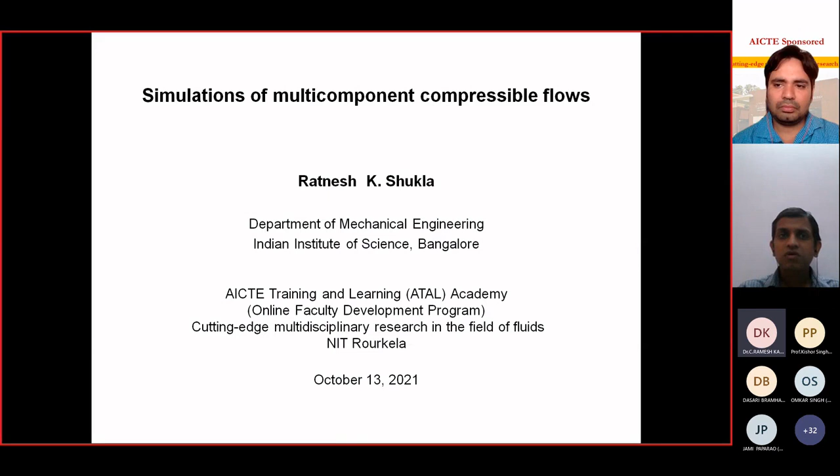In this talk I'll talk about simulations of multi-component compressible flows, and these are actually ubiquitous in nature. So if you look at ejection of a volcano and the kind of gases that come out of it, the particles - it's a particle and gas laden flow which is very distinct from the ambient. It's a very common example of a multi-component flow, and this ejection takes place at a relatively high speed. So the flow is compressible as well, right?

I mean, later after the ejection, once the jet expands and so on, you may enter into a relatively low speed regime, but right at the point of ejection, the ejection speeds can be sufficiently high for compressible effects to be important. So we'll see this is one of the examples, but we'll see several more as this talk progresses, and these kind of scenarios where one gets very high speed flows in nature alongside multi-component behavior, where you get a lot of different components sitting together in the same flow field, is very common. These sort of applications are also common in technological areas.

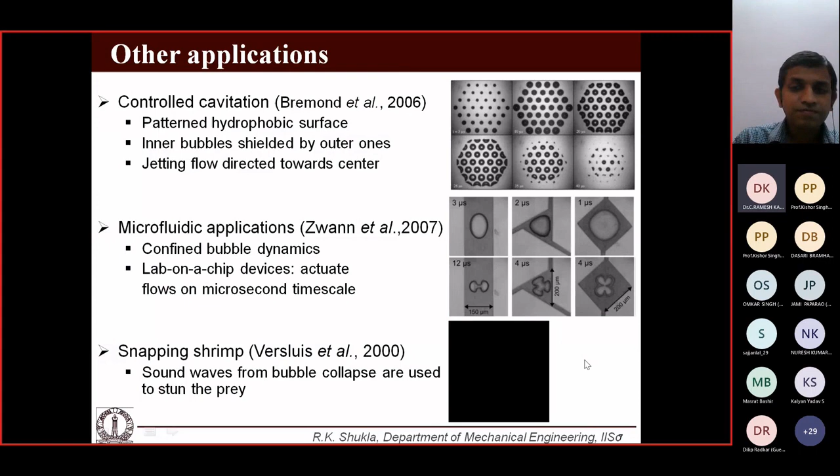Just as a cool thing, there's a reference to snapping shrimp in Hollywood as well. This was, I think, a very recent movie where the actor says that the strongest animal on this planet is not the lion, it's the snapping shrimp, because of these stunning things it can do.

I mostly talked about the experimental part and what is actually observed in nature. What we really want to do is understand and analyze this intense process using simulations - that's the primary objective of this talk. How do we develop simulation tools that can accurately account for this intense and fast process? Clearly, this is a very multi-scale setup - you have water on one hand, air on the other.

Water, as you would know, is almost incompressible. We don't really hear about shock waves in water, though they are always there. Water is so stiff that one normally thinks of it as completely incompressible - it's not very easy to attain a scenario where water becomes compressible. But this is a kind of flow where this bubble collapses to such an extent that it's like an underwater explosion, so essentially there are finite compressibility effects.

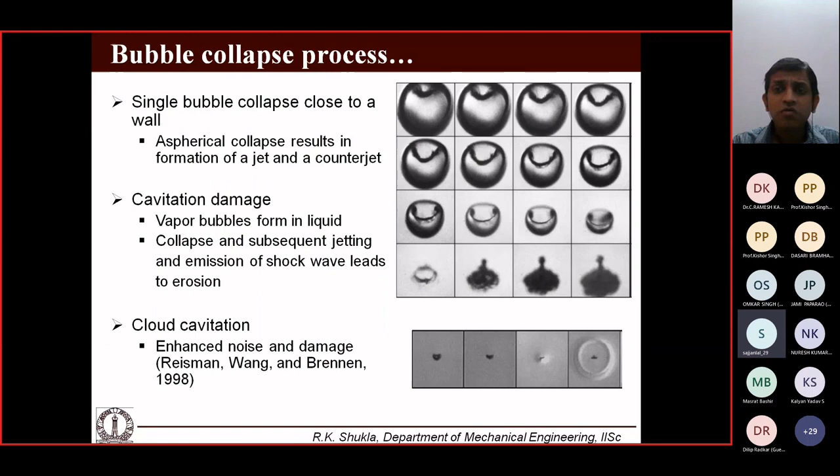Sir, one small question. You are talking about these bubbles, so when are these bubbles formed? If an aeroplane is flying at a very high speed, at a very high Mach number, maybe at 800 kilometers per hour, is it due to that pressure that these bubbles are formed? It's a liquid bubble. No, well, when we talk about airplanes, it's actually a drop, not really a bubble, if you think about it, because here condensation has taken place.

Yeah, it's a different scenario. Here you have air which has water vapor in it, and there's an expansion fan that is created. Expansion meaning, think of it as you have air and you have suddenly increased the volume that it occupies. So it will undergo isentropic expansion, which means the temperature will drop, and if temperature drops below a threshold, you can get condensation. So this is more of a condensation effect, not really a cavitation effect. Here, on the other hand, you have extremely low pressures that are created inside water. So here you have creation of vapor bubble pockets, basically. You have vapor bubbles that are created.

Okay, sir. Okay, sir. Thank you, sir. So the two scenarios are kind of distinct. Any other questions? Any other questions from the audience? Yeah, I think we can go ahead, sir.

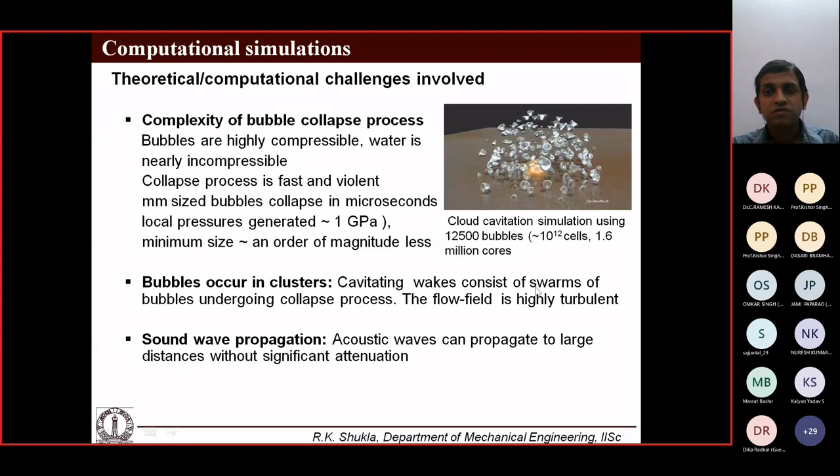So we know that this is a challenging simulation, and let's think about what are the desirables that we want in this simulation. So some of the desirables are we should certainly allow for large interface deformations. This bubble actually grows, it expands, there's a jet that is formed, and all this means that the interface of the bubble can undergo significant deformation. So that must be allowed for.

There has to be interface capturing. There's certainly an interface that separates the bubble from the liquid, so we have to have interface capturing methods. We also need shock capturing methods, because during this collapse process, shock waves and blast waves are generated. So one has to have shock capturing capability as well.

Beyond that, it's preferable to have conservation because we have shock waves and we also have interfaces. So it's not just preferable, it's mostly a requirement that one has to be able to conserve mass, momentum, and energy. Without this conservation, we will not get accurate treatment of shock waves. So this is more of a requirement.

What's special beyond regular shock waves? If you are familiar with shock capturing, you would know that once conservative treatment is applied, there are a lot of different techniques that are available now for capturing shock waves, whether they are weak or strong.

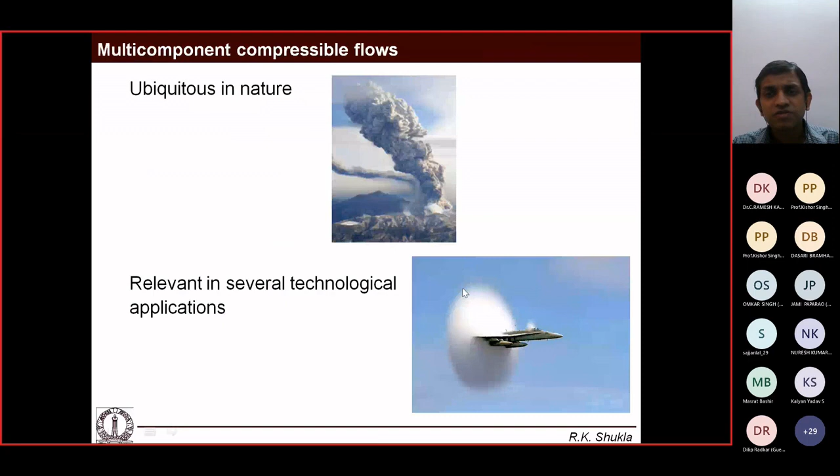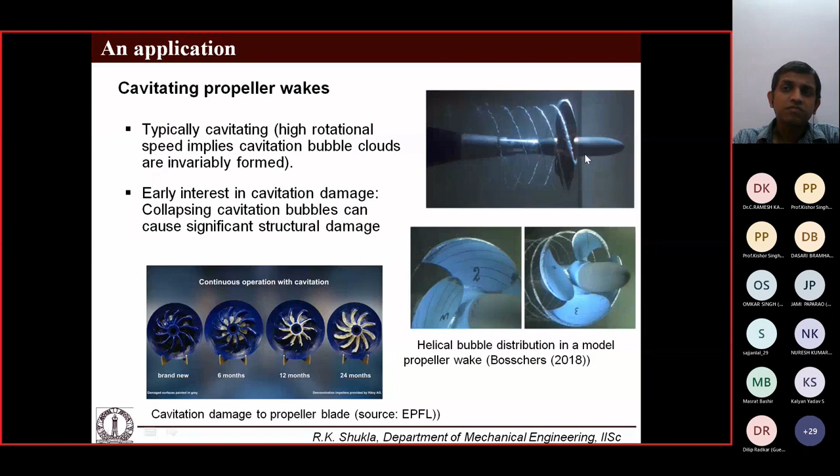Not only that, we are looking at cavitation actually. So as somebody pointed out, how is this pocket of droplets formed? If you look at this jet that goes through Mach 1 transition, you have formation of these droplets. Similarly, in this cavitation scenario, as these propeller blades rotate very fast, you actually have formation of these bubbles - vapor bubbles. So you are creating a new medium inside this medium, which is water.

So if one wants to actually do a first principles investigation of cavitation, one has to allow for the creation of multi-material interfaces as well. It's not always that you will start off with a bubble. You will have to allow for the fact that if the pressure drops below a certain threshold, you will get bubble formation.

And not only that, one has to be able to ensure that the whole formulation we take is relatively insensitive to constitutive laws. In other words, this formulation should hold whether today you have one equation of state for water and tomorrow you decide that this equation of state is not enough for your purposes and you need to change it. So the formulation should be such that it allows for this change. These are some of the challenges that are very specific to this bubble collapse problem.

So in this work, what we do is take this so-called single fluid treatment, where the conservation laws - basically the mass, momentum, and energy - are written for all the phases that are present in this setup, so for both water and air.

And these different phases are distinguished using this variable phi, which one can think of like the void fraction or the phase field. This field is governed by the interface advection, a simple interface advection with the local flow speed u.

I'm just showing why these propagating vortices and other features are important. If you look at a very simple case of flow past a cylinder, we know that as Reynolds number is increased, you start getting smaller and smaller scale flow features. Once Reynolds number is increased from 200 to 2000, you get smaller scale vortices, and the wake becomes more complex. Increase it to 20,000, you get even more smaller features, and the wake is increasingly complex. So to be able to resolve this, one needs higher order methods plus a sufficiently fine mesh.

Whereas when one has shock waves and interfaces, only a first order method is guaranteed to be monotone. Only a first order method can ensure that shock waves are captured without oscillations. So how does one balance out these two contrasting requirements?

The idea is to use what is known as weighted essentially non-oscillatory treatment. One ensures that if there's a shock wave somewhere in the domain, you find out where that shock wave resides, and close to it, use methods that do not produce any oscillations. But in a region where there are no shock waves, you use methods that are best for propagating vortices, turbulence, and so on—basically higher order methods.

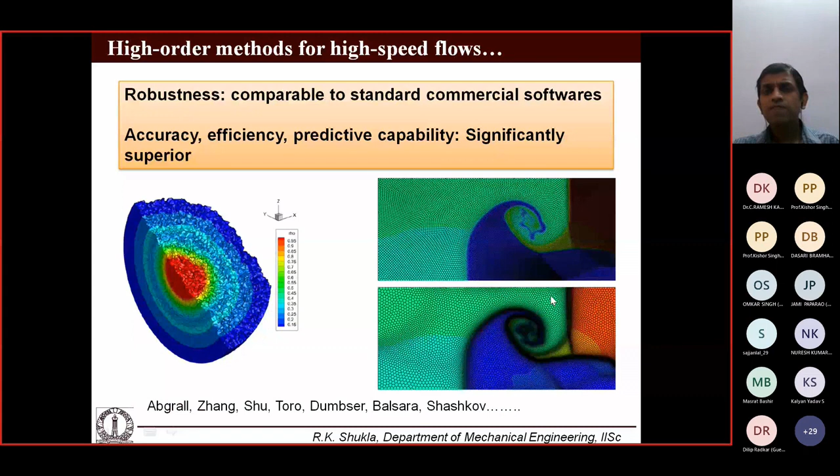One needs to be able to reduce the numerical dissipation and increase the order of accuracy, and that is done through this WENO discretization. I'll briefly talk about the WENO discretization on unstructured grids. This is something we have spent quite a lot of time with, so that we can move forward with this particular problem at hand. Let me skip this slide and go on to the WENO scheme, what it really does.

If you're familiar with higher order methods, you'd know that what they typically do is take a wider stencil and try to come up with approximations based on data from each of these nodes. So if one has a uniform mesh where, in one dimension, the data resides at I plus 1, I plus 2, I minus 1, I minus 2, and so on, then to construct something like a fifth order method, one would take all these 5 data points and apply—let's say I want the formula for the derivative at this point—polynomial interpolation or Taylor series expansion to come up with a formula. This is the typical approach used for higher order method construction.

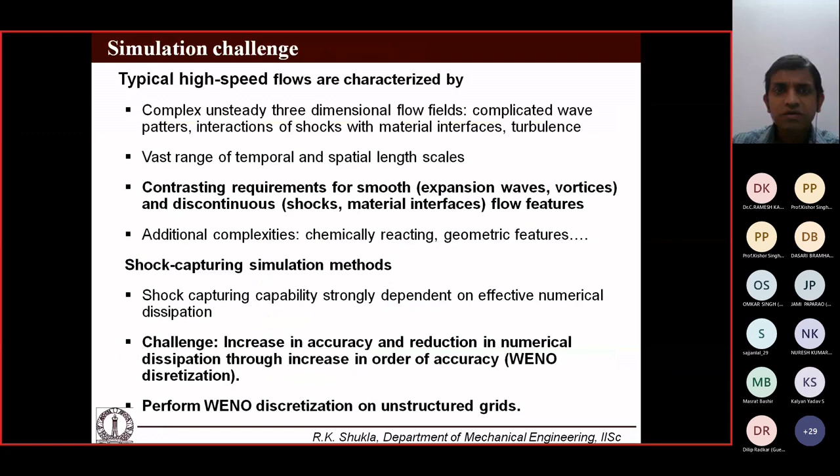Hello, your mic - can you hear me? Now I can hear you. In between it was stopped. Oh I see, it's proper now. Okay, all right, the screen is visible I hope. Yes. Okay.

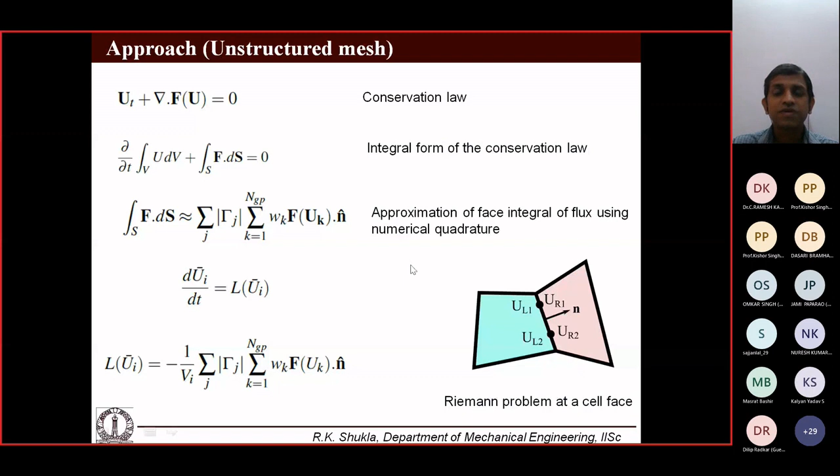That's the upwinding idea. Basically, you figure out where the wind is blowing and then take the appropriate value, which gives you a stable solution. Here, when there are shock waves, rarefaction waves, and strong compressibility effects, the correct upwind value actually depends on the Riemann problem—the solution structure that emerges out of this entire system.

So that's why one tends to solve this Riemann problem at each of the interfaces to figure out the correct upwind flux, which ensures the computations remain stable. Now, what are the advantages? Once we use a sufficiently higher order method, discontinuities are spread over only a few grid cells, and features like propagating vortices are accounted for accurately because we use a higher order method near these features, while the lower order method is only used where we have shock waves.

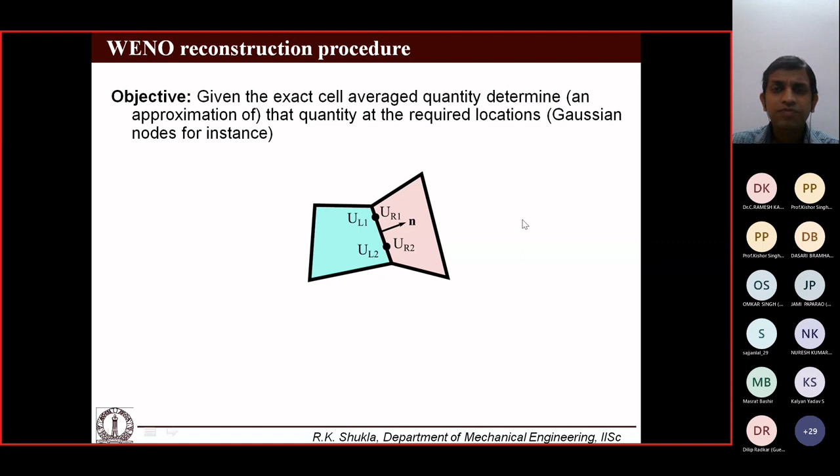Let me spend some time on the WENO reconstruction itself, because that's also a complex operation—not straightforward, especially on an unstructured mesh. A key operation here is figuring out the values of the state variable along all the interfaces, given the cell averaged quantities. I'll illustrate this procedure on a Cartesian mesh.

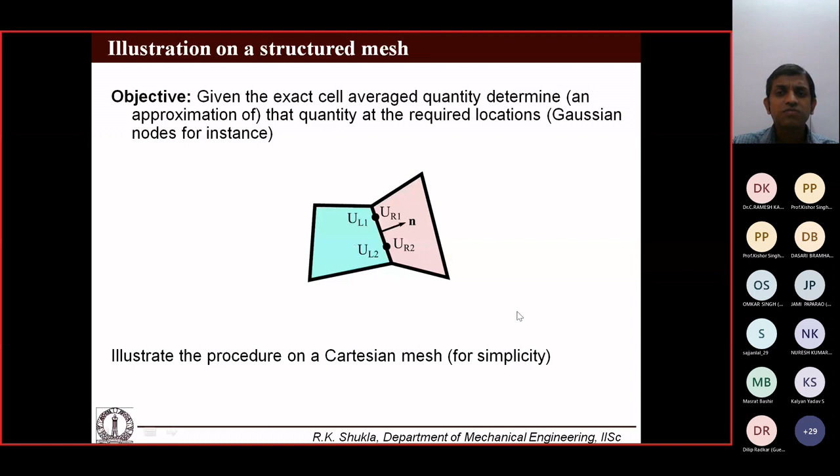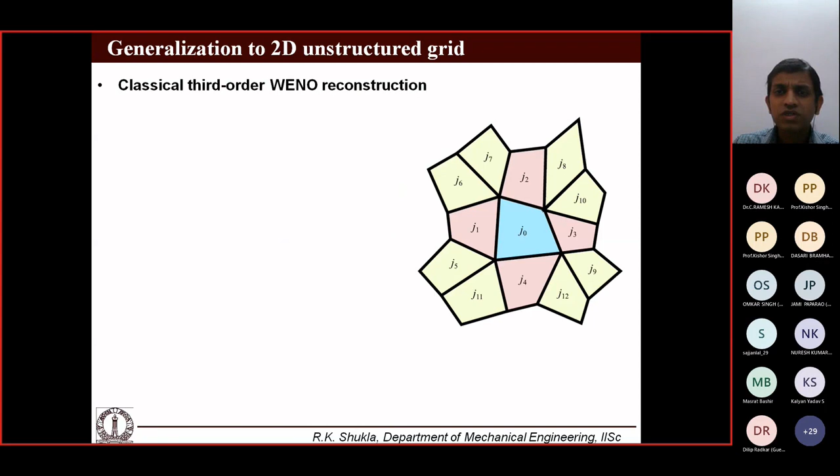So what we actually do, coming back to the scenario I showed earlier, is take a fifth order method formulated over this entire stencil, and a bunch of third order methods. We add them all together in weights that can be suitably chosen, and then use that approximation to figure out what we should do.

So if we know there's no shock, we directly use the fifth order method—we don't try to combine third order methods to come up with it. If there are shocks, then we apply each of these third order methods in an appropriate manner. All this is done so that the algorithm automatically decides which approximation to take. That's the basic philosophy.

I thought I'll just illustrate this for a simple Cartesian mesh. So if we have a cell here over which we want to figure out how the solution varies, what we do is expand the solution out in something like a Taylor series expansion. Here we use Legendre basis functions because of the simplicity they give—the expressions tend to be less cumbersome, and the smoothness indicators tend to be very compact. That's the basic reason.

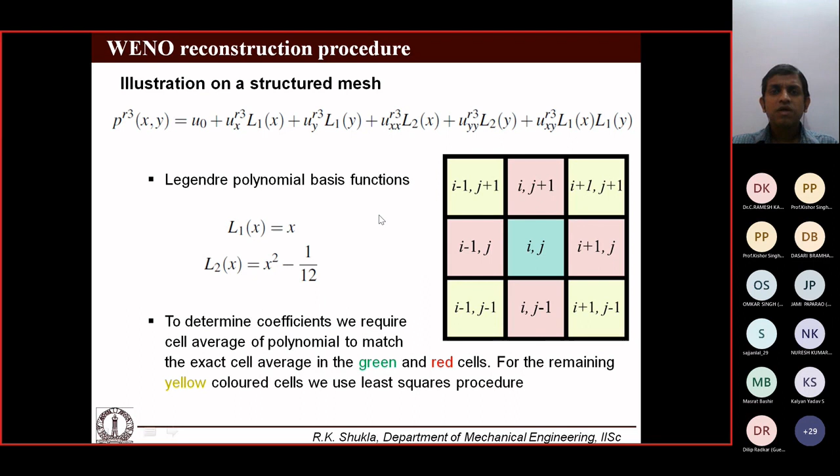Using these expansions, what we do is ensure that the cell averages over all these different colored cells match the average of this P. Once we have that, these coefficients can be easily figured out, and one has the full approximation.

One also gets this smoothness indicator. I talked about combining fifth order, third order, and various order approximations, but how do we actually combine them? We need something to tell us whether there's a shock or no shock, and that is done through the smoothness indicator, which is basically a sum of these various derivatives, all up to the highest order point.

So if we have a third order method, we go from the first order derivative all the way up to the second order derivative—various possibilities. If the solution is not smooth, one expects that at least one of them will blow up. If you have a discontinuity, you expect that the derivative across it will be extremely high. That's the basic idea.

These smoothness indicators involve a convex combination of the derivatives, so if there's a discontinuity, that will show up in the smoothness indicator. On the other hand, if there's no discontinuity, one expects this will be an order one quantity.

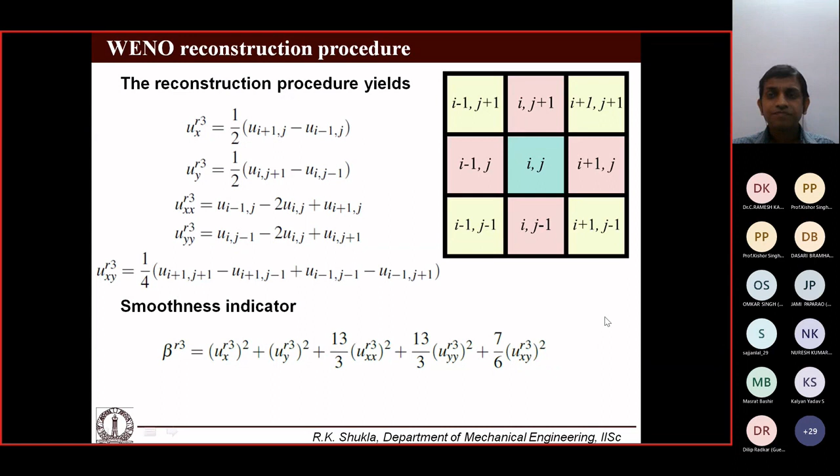I'm not going to go into the details here, but the use of this Legendre basis function simplifies this smoothness indicator quite a bit.

This very same idea can be extended to unstructured grids as well. We may not find explicit solutions like this, but we can formulate the entire problem as shown here, and come up with a system for finding the coefficients, solving it using the least squares method to get the entire system of coefficients. Once the coefficients are deduced, one can have second order candidate stencils like these, over which one can formulate a second order method, and then combine them all together to get a WENO polynomial. So that's the basic approach.

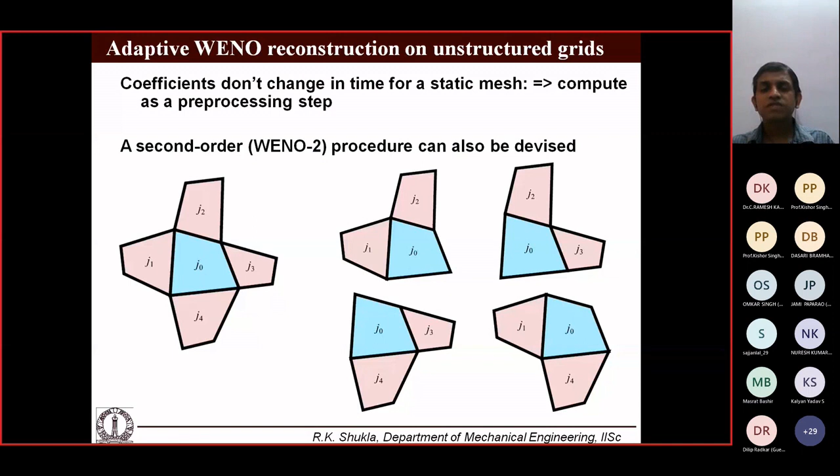When it comes to boundaries, there are complexities there as well. If you think about what's typically done in computational fluid dynamics, for a boundary on a Cartesian mesh, it's relatively straightforward to use ghost cells to implement the boundary conditions. So if I have a no-slip wall, I can compute my velocity field in each of these cells such that I get zero velocity all along this boundary.

And if I have another stencil where more cells are needed, I can extend this process—figuring out the values here such that the velocity becomes all zero. That's the basic idea behind ghost cell based construction.

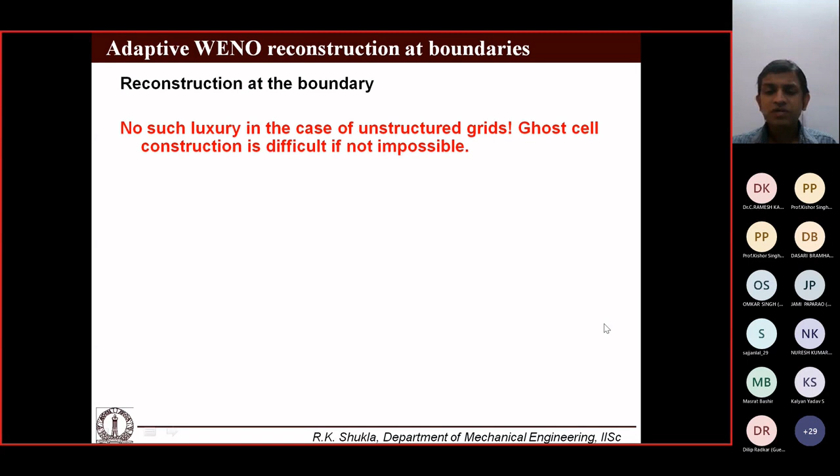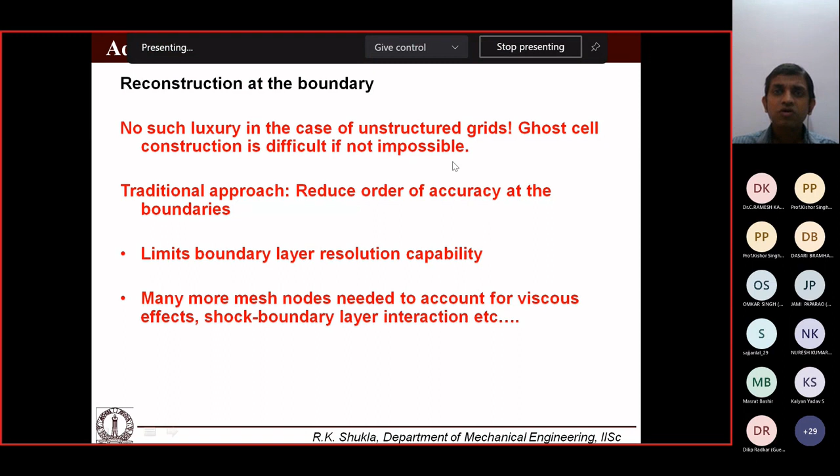Now, when it comes to an unstructured mesh, things are much more complicated—we cannot just generate ghost cells like this. So what do we do? One possibility is that we reduce the order of accuracy: we say we cannot create these ghost cells, but we can use incomplete stencils and reduce the order of accuracy to whatever we can, then do our boundary treatment.

But the problem is that for any problem involving boundary layers or features at the wall, our resolution becomes limited, so our calculations of the skin friction coefficient will be off. This is not something we desire. So instead, we use these boundary conditions as constraints—if this is a no-slip wall, all along this boundary I should have zero velocities, so I can impose them as constraints onto this reconstruction operation.

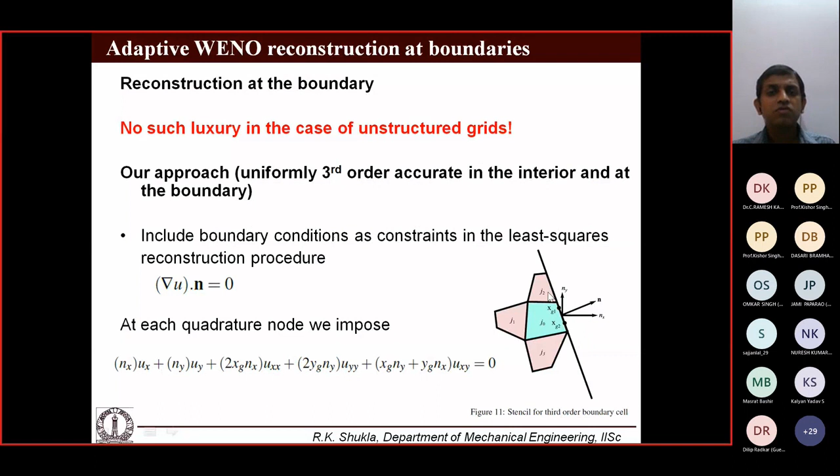When I'm figuring out what is happening to the solution inside the cell, I can add this constraint and treat it in this entire reconstruction framework. So that is what we do when we have either homogeneous or Neumann boundary conditions of this form. It can be very easily adapted to our general framework here.

And the process of reconstruction, however, almost remains the same. Basically, one again has these weights that can be applied to figure out the WENO interpolant, and one has these smoothness indicators that tell us whether there's a shock in the setup or not.

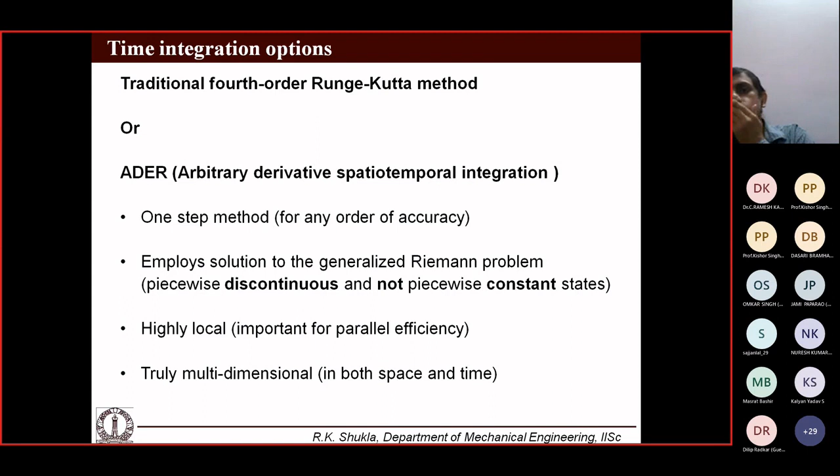Sir, I would like to ask, as you said, third order, but on unstructured meshes getting more than second order is a very tedious job. So here you're proposing the idea where first we create the second order and then we extend further for higher order using the basis of that reconstruction, like polynomials.

Yeah. So the polynomial direction, if I understand, the third order needs 3 unstructured cells, right? At least. It needs a lot more, Kishor, because you need to be robust, actually. So that is not something I talked about.

On an unstructured mesh, there are a lot of possibilities for the arrangement of cells. You may have a situation where there are none of these yellow cells at all. You may have a cell which is only surrounded by these pink ones. So one has to ensure that all these different possibilities are accounted for. But nonetheless, the coefficients to be determined remain the same—1, 2, 3, 4, 5, 6 coefficients.

That means I should generate at least 6 conditions from the stencil that I have found. But actually, in practice, you require around 10. The common practice is to have at least 10 to ensure that you are robust. And the reconstruction operation is genuinely multidimensional. So you can see that the basis functions used here involve x, y, x squared, y squared, and so on—these variables, basically.

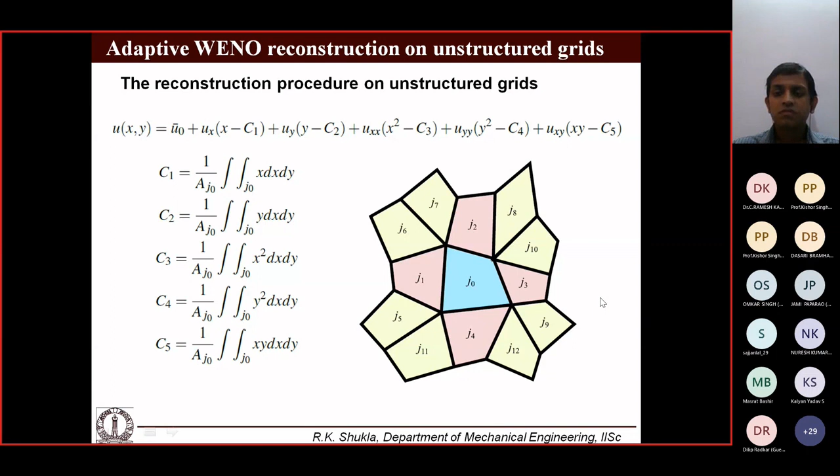So once this spatial discretization is complete, there are various options for time integration, as I mentioned. One can go with the traditional Runge-Kutta methods, like fourth order Runge-Kutta method or strong stability preserving Runge-Kutta method. Or one can also do this arbitrary derivative approach.

Again, we are not going to go into the details of this in this presentation, but this is a well-established technique now. It's more like a one-step method where the temporal derivatives present in any solution are actually converted into the spatial derivatives. In a way, if you recall the modified equation approach, it's kind of similar, not exactly the same, but similar to that. You essentially convert all the temporal derivatives into spatial derivatives so that a one-step approximation can be used to integrate the equations in time.

And the advantage with that approach is that it's very local. Because it's just one-step integration, it's very good for parallel efficiency. So parallel implementation of the code becomes simplified, and you can attain large parallel efficiencies. Not only that, the approach is multidimensional because both space and time get coupled together. So there are advantages of using this arbitrary derivative spatio-temporal integration, basically.

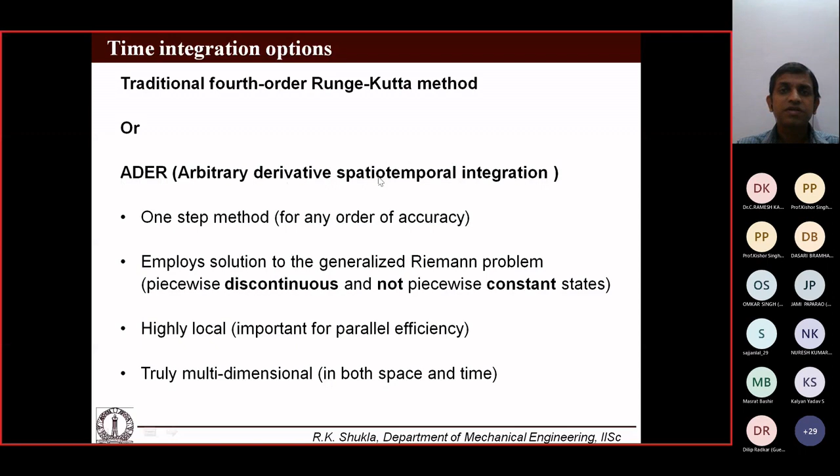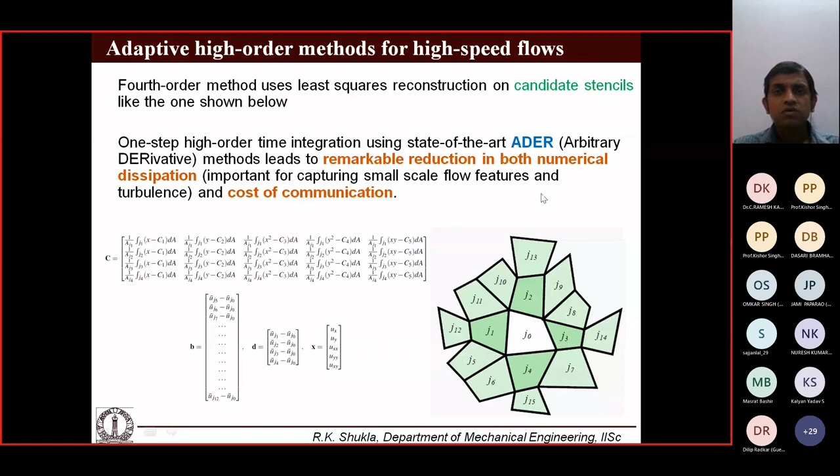Now, with this, I will just demonstrate some of the simulations that we have been able to do, and this is the first one. A very simple accuracy test involves propagation of an isentropic vortex, or also a Taylor-Green vortex that you might be familiar with, in which you start off with a bunch of vortices, and as they interact, they become increasingly complex and can give rise to turbulence, basically a decaying turbulence sort of scenario. The motivation here is to establish the accuracy and convergence rates, and also study the scalability of this entire formulation.

This isentropic vortex test case is a doubly periodic setup, meaning this vortex advects and then comes back into the domain and continues to advect. In an inviscid scenario, this vortex does not undergo any deformation, and one is expected to get back the same vortex no matter how many times you advect it.

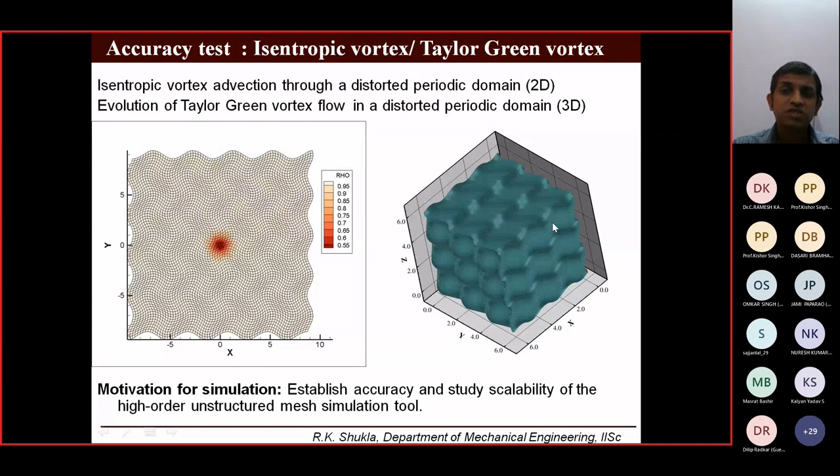This is the Taylor-Green vortex flow, solved over this domain, which is purposefully distorted so that our unstructured mesh formulation can be tested completely. What we find is that if we compare our results with direct numerical simulations, our implementation is not too bad. The dissipation rates from our implementation are very nearly comparable to those from direct numerical simulations.

We also did some scalability tests. Looking at advection of the isentropic vortex test case, we find that if we go up to around 10,000 processor cores, the scalability of our method does not deteriorate significantly. We still get in excess of 90% parallel efficiency, even at this large processor core count. So this approach works quite well. We do get higher order accuracy as well as good parallel efficiency with this approach.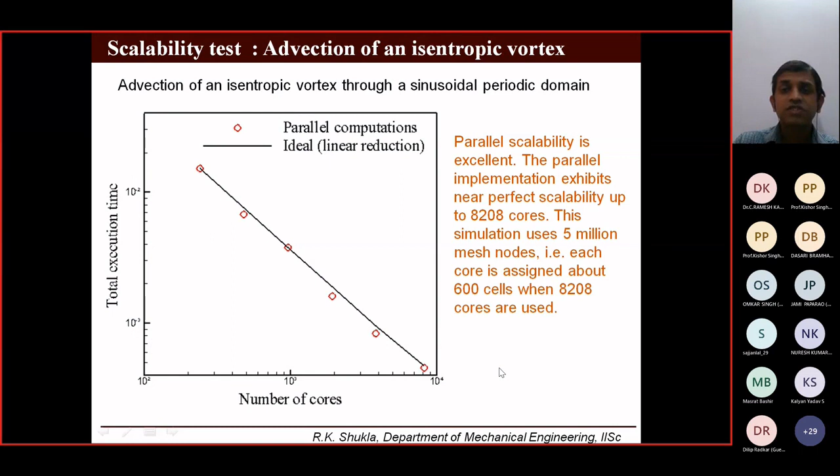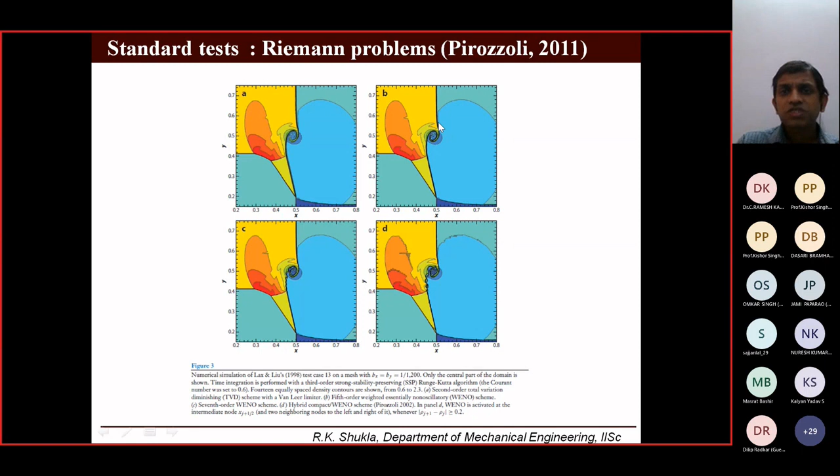This is one of the test cases taken from a paper cited here. You can see there's a vortex that forms in this test case, and this is the kind of result we get. We have run it at reasonably high resolution. Not only that, we also get these Kelvin-Helmholtz instability patterns along this contact line. These would show up only when the method has low dissipation and the resolution used is sufficiently high. The fact that we can capture this tells us our method is indeed a low dissipation method.

In fact, with a third order method, you don't actually get these features. We can run a fourth order WENO as well as a third order WENO, but with the third order WENO, we don't get as many flow features because the dissipation is comparatively higher.

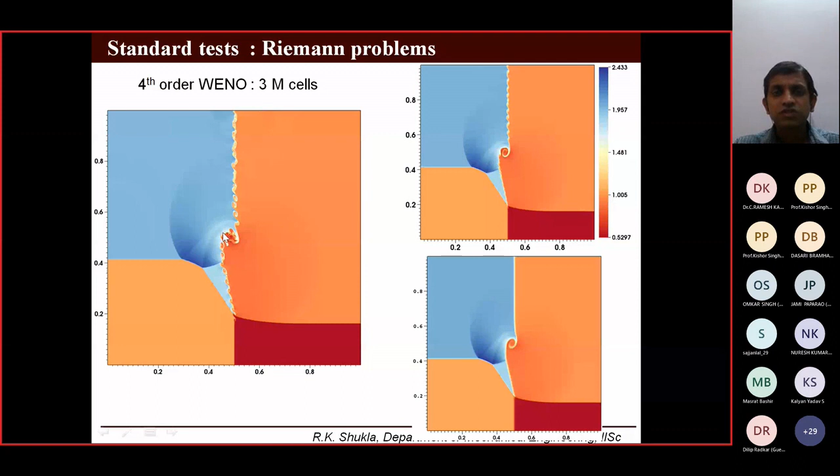Similar setups are possible. This is another one taken from a different paper. You get flow features where you have vortices that are sheared and contact lines also. The amount of detail we capture is extremely high, much higher than what is captured here. The order of accuracy used here is actually seventh order, and ours is a fourth order method, but obviously we are using many more grid points as well. That is a fact.

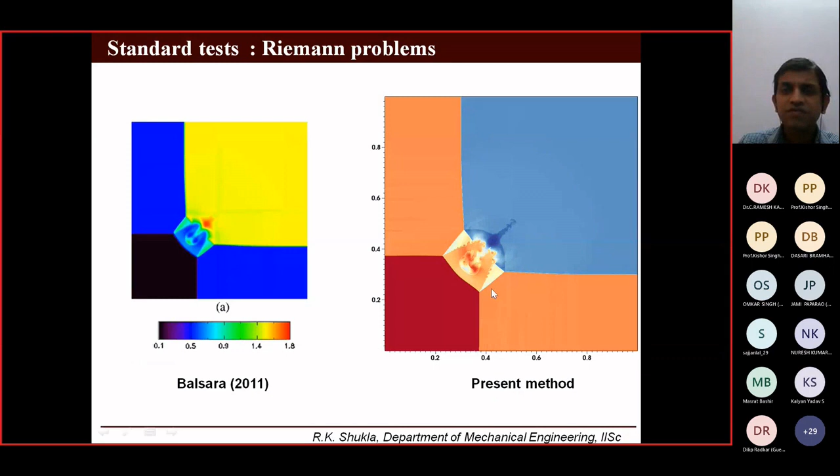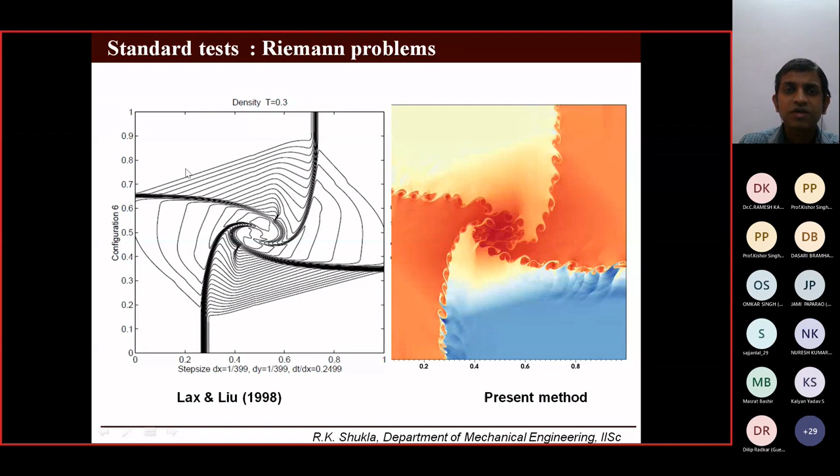Almost for every Riemann problem one can find in literature, our method captures and gives far more details. Here you can see what kind of details are captured using our method, compared to what is captured in the literature.

There are more challenging setups that can also be simulated. I'll just skip this one and talk about flow past a cylinder. This is a Mach 10 shock propagation over a cylinder.

I hope you can see this animation. You can see here that not only does our method capture these various shock waves, but it also captures the unsteady wake that is formed. This shedding of the vortices is captured pretty well.

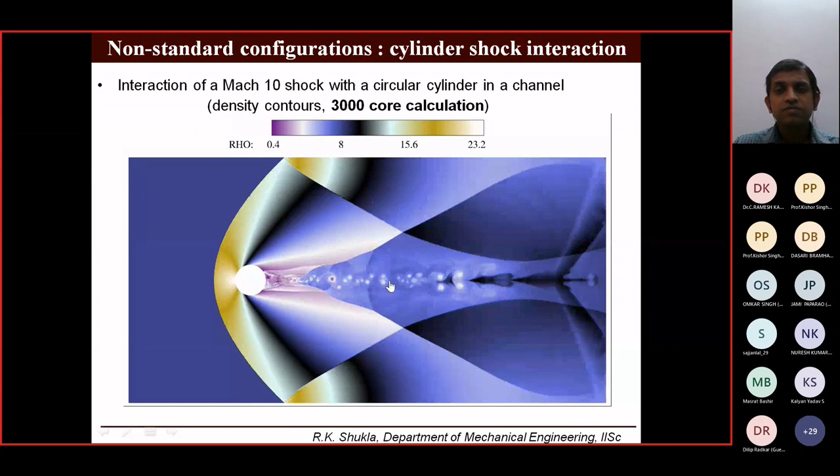And this is a 3000 core calculation, so a reasonably large calculation. The mesh applied here is unstructured. Let me come to that, Kishore.

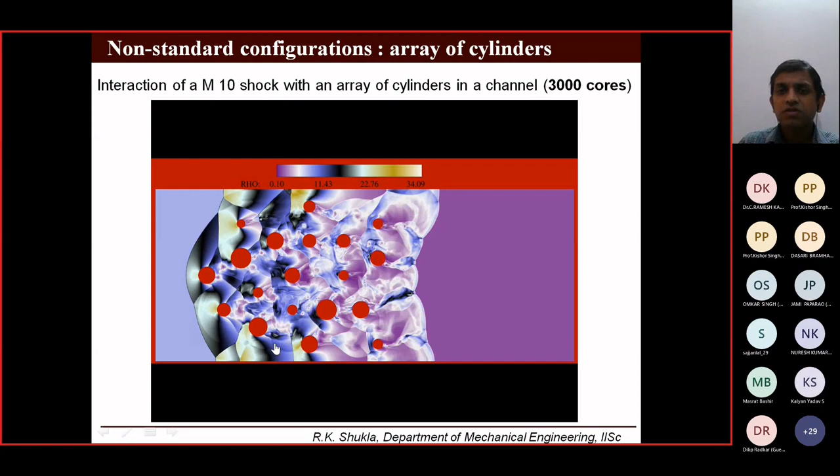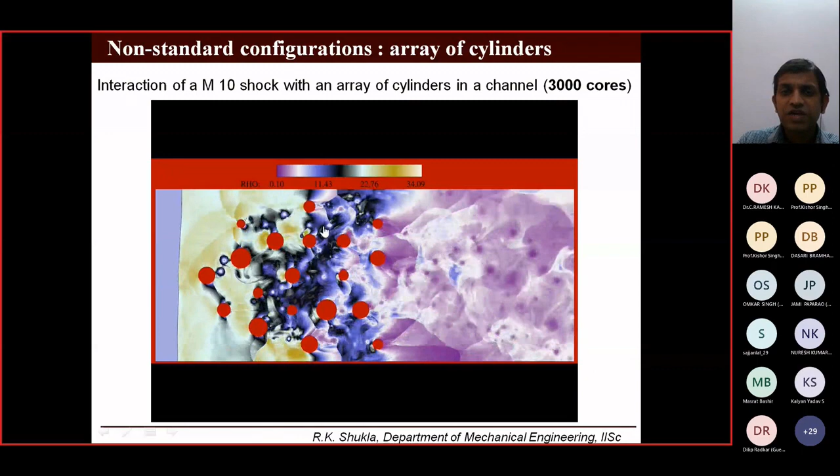This is a similar problem like flow past cylinder, but here you have a cascade. You can see we can capture these shocks as well as very strong vortices. The solution is non-oscillatory. You can see very detailed wake patterns are captured here as well.

I hope the animation was visible, despite the fact that we are doing it over internet. Yes, it was.

So, was there a query? Audience, anything you'd like to clarify here?

Okay, I'll just continue. So we have done a bunch of calculations, just to test the fidelity of the solver. This is like flow past a foil with a flap. I'll go reasonably fast over these.

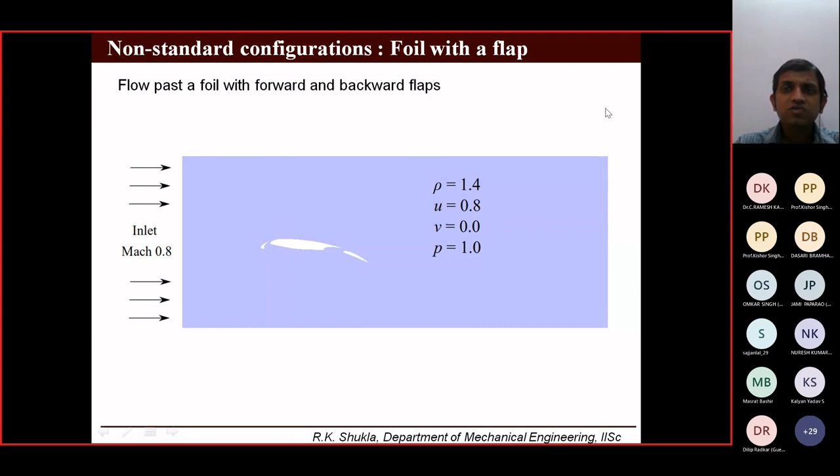Here the mesh can be very unstructured. You can have a higher mesh density close to the foil, and these are the kind of flow patterns that we get. When the flow starts, you get these shock waves that are formed, and then you also get propagating vortices that travel over the surface and are shed into the wake.

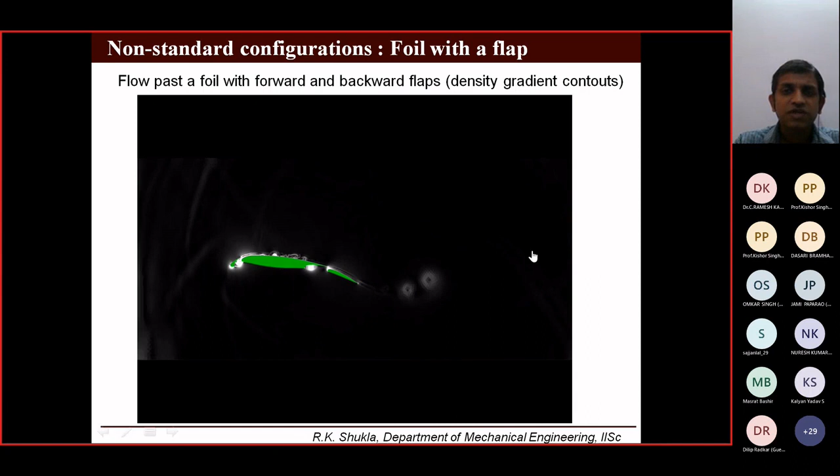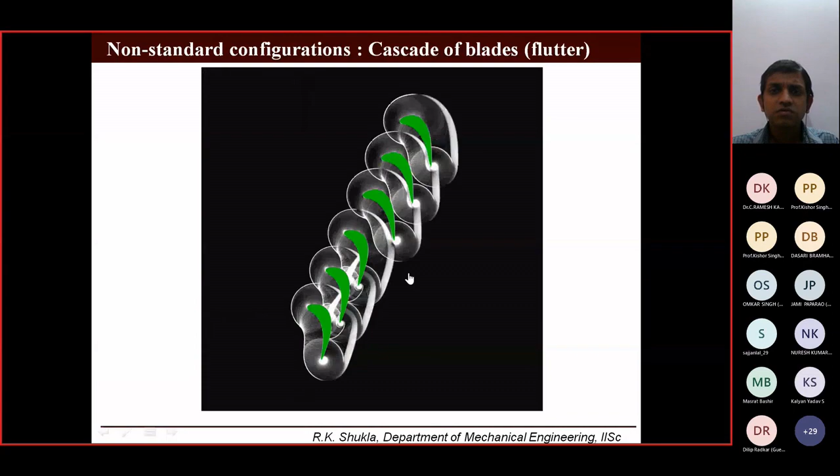So a lot of these different flow scenarios can be computed. We can have a cascade of airfoils as well. You can see formation of shock waves as well as these strong vortices. So there's flow that enters this cascade and then exits like this.

Because the primary interest is in getting on to the multi-phase part, let me still show this one as well. This is a non-standard test case in the sense that there's complex geometry. In this blue region, we basically have something like ambient air. We have a triangular inclusion somewhere in between, and we have an explosion scenario where this circular region consists of very high density and very high pressure.

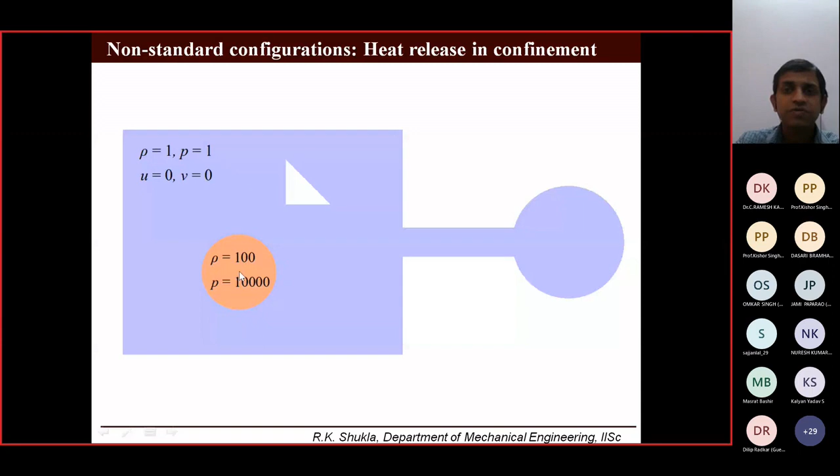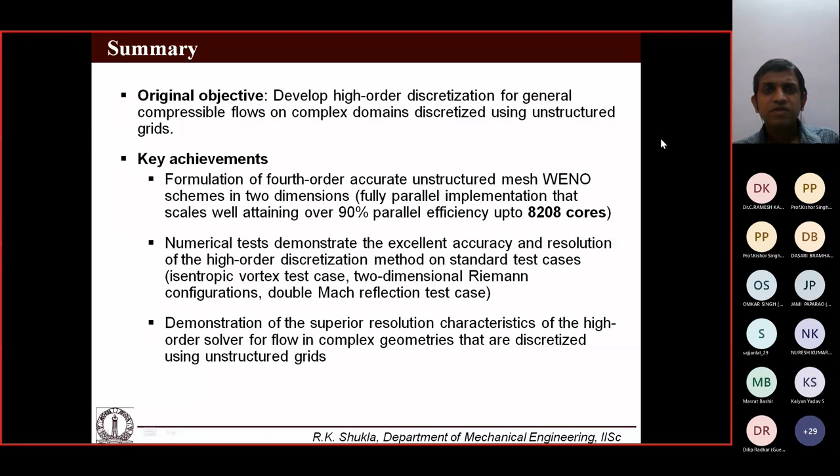This technique can essentially be used fully in parallel, and it's fourth order accurate, so it's low dissipation and can be used on a large number of processor core counts, allowing us to look at very detailed flows. Okay, now let me just move on to the multi-phase flow part.

So the multi-phase flow part: till now we have looked at the fact that we want to capture propagating vortices and shocks both simultaneously, and still use a higher order approximation as much as possible. What is special about the multi-phase part? What do we need for that? The key aspect here is that we need to be able to capture the interface that separates the two phases. What is special about this interface is that it's a contact discontinuity.

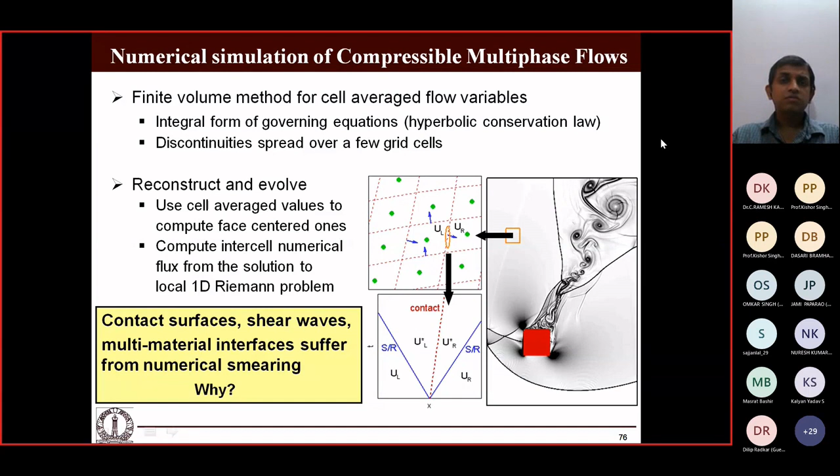One of the problems is that if we take a simulation and just apply the compressible flow solver to it and use it for a multi-phase setup, the interface will diffuse over time. That is because the interface is treated like a contact discontinuity, and by its very nature, the dissipation added to keep the solution stable will continue to spread this interface over time. That spread is unphysical and not desirable.

In a simulation, if we start off with a bubble that is initially sharp, and then over time, just because of bad numerics, it spreads, that's not desirable. It should spread only if it has to, for instance because of evaporation or mass diffusion. But if it spreads because of numerics, that's not something you desire. So we spend considerable time trying to come up with methods which prevent this spread, to ensure the interface does not spread.

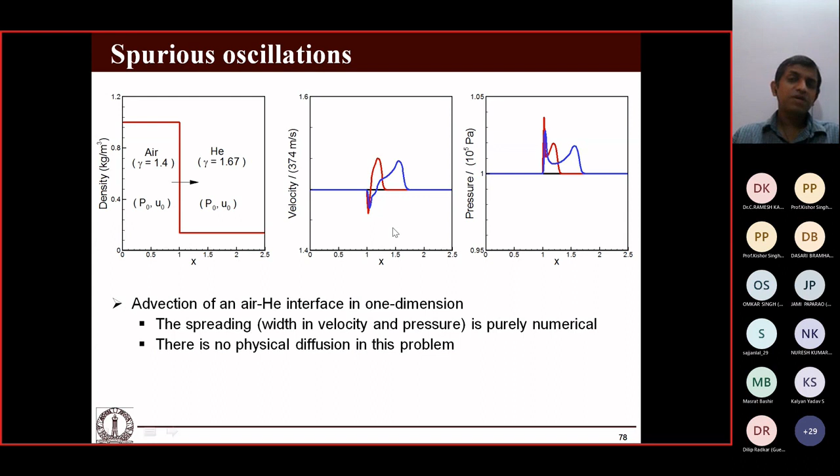If we allow it to spread, even in a simple one-dimensional setup where you have air on the left, helium on the right, with an interface that advects—if we apply a typical compressible technique like what I've shown so far, one finds that not only does the interface spread, you also get spurious velocity jumps and pressure jumps. If the interface simply advects, one should have constant pressure and constant velocity maintained throughout. It should not change at all. But that does not happen with typical compressible flow solvers.

So we have remedied this through various means. Our solutions have been discussed in detail in the literature, and our method is one of them, which relies on this diffuse interface treatment. If you recall our objective from when we initially talked about different methods, one of the key requirements is that we want to allow for creation of interfaces. If cavitation inception takes place, one has to be able to grow a bubble in the liquid. That requirement can only be satisfied by this diffuse interface method.

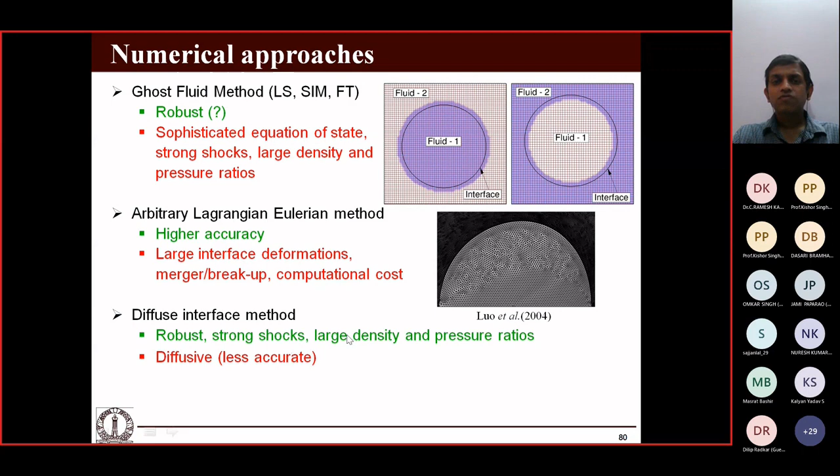So for this reason we went on with this particular method, and we also ensured that the interface does not thicken over time. To overcome this problem of numerical dissipation continuously thickening the interface, we came up with an artificial compression method, similar to a conservative level set method, and ensured that the interface thickness remains maintained throughout the simulation. Even though the interface is spread over a few cells, the number of cells it's spread over remains the same throughout.

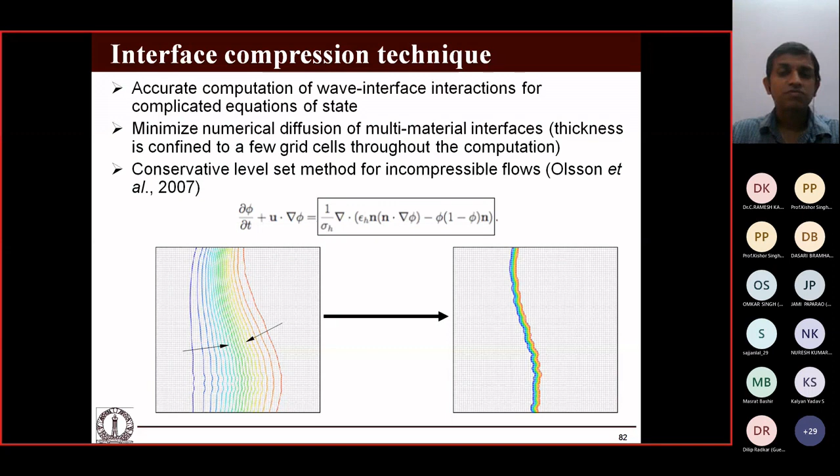This is more about trying to summarize the kind of challenges one can face and how one can overcome them. Problems like these require integration of a lot of different techniques. This is another technique that one can integrate into this setup. We know that in these problems, the bubble undergoes a lot of deformation.

The bubble can shrink a lot, its size can vary a lot, so it makes sense to not just use a uniform unstructured mesh everywhere in the domain, which is non-adaptive. One wants to do something like an adaptive mesh, where let's say a bubble is sitting here and another bubble is sitting here—you would want to put more mesh points close to wherever the bubble sits, because that's where most of the action takes place. This can be done using adaptive mesh redistribution, a technique added onto this flow solver that allows us to put more grid points close to the bubble or wherever the action takes place.

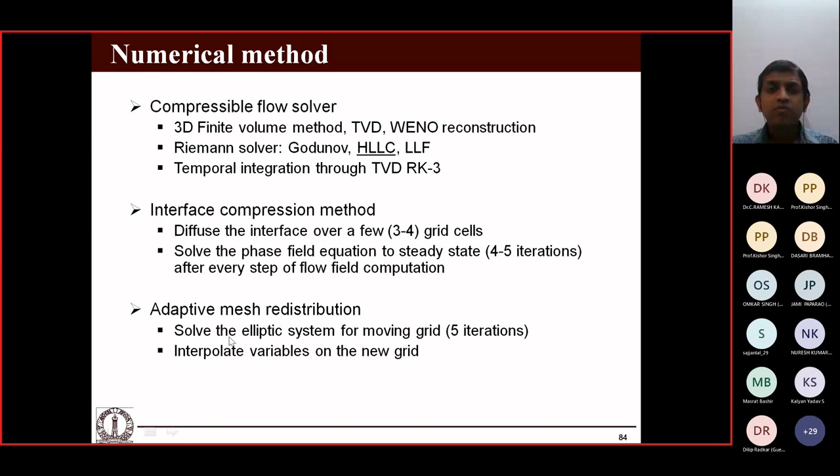I have mostly talked about the numerical method in the compressible flow part, so I'll just skip this. The only added component here is the adaptive mesh redistribution part. With this, one can look at a whole bunch of problems.

We looked at one-dimensional setups first, so that we are confident in the solver—here one can get an analytical solution. You can see here we have a shock in water that goes on and hits an air-water interface. After the shock hits, it is transmitted into air. This shock is weak, as I talked about before—it won't be very visible because the density of air is much smaller than the density of water. But if you look at this exaggerated view, you actually get a shock, and you get a reflected rarefaction wave, an expansion wave that is transmitted into water.

This particular problem can be solved using our technique, and we get results like this. Because we have ensured that our interface does not diffuse a whole lot, we get much cleaner results than what one would get if the interface were allowed to diffuse. If the interface is allowed to diffuse, not only are you diffusing the bubble, you actually get inaccurate results as well—this tail of the rarefaction tends to be erroneous.

This map shows how our mesh points are arranged. Initially, when we start the simulation, because there's a shock in water that goes on and hits the air, the mesh points are clustered close to the shock and also close to the water-air interface. That interface remains stationary till the point at which it encounters the shock.

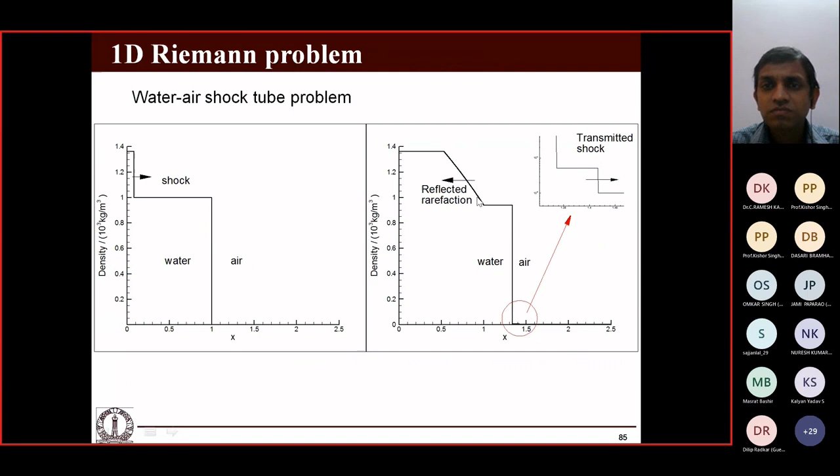Overall, our technique works well in 1D, and comparisons with exact solutions are favorable. So we moved on and looked at 2D setups.

This is a very standard setup used in the multi-phase flow community, high-speed multi-phase flow community. A shock in air hits a helium cylinder placed here, and once it hits, a lot of wave patterns are created. You get a transmitted shock wave, a reflected shock wave, and these shock waves inside this helium cylinder. The cylinder itself keeps deforming, and it also leads to formation of a jet.

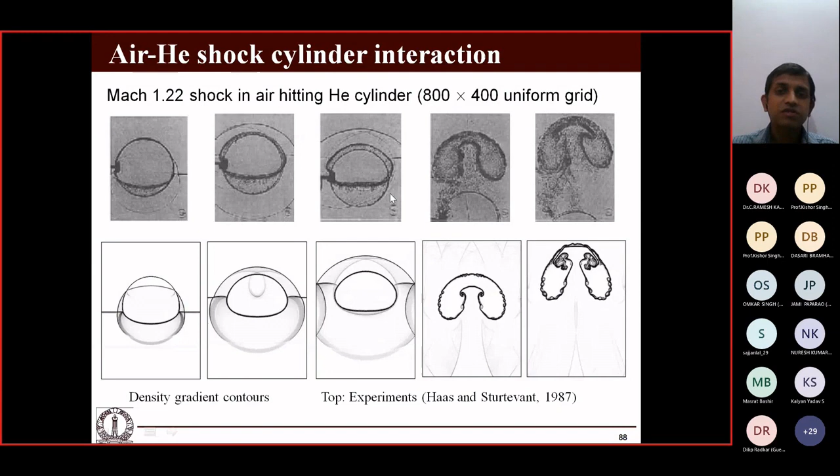This jet is actually less strong than what you get in a cavitation bubble, but it's still a jet nonetheless. If you look at what is obtained experimentally, these results are qualitatively in good match with what we obtain using our numerical simulations.

Our simulation can account for this extremely fast and intense process, and is well suited to do cavitation collapse studies. This is another example - cavitation is just one of the problems we can tackle. We can also tackle shock waves hitting, for instance.

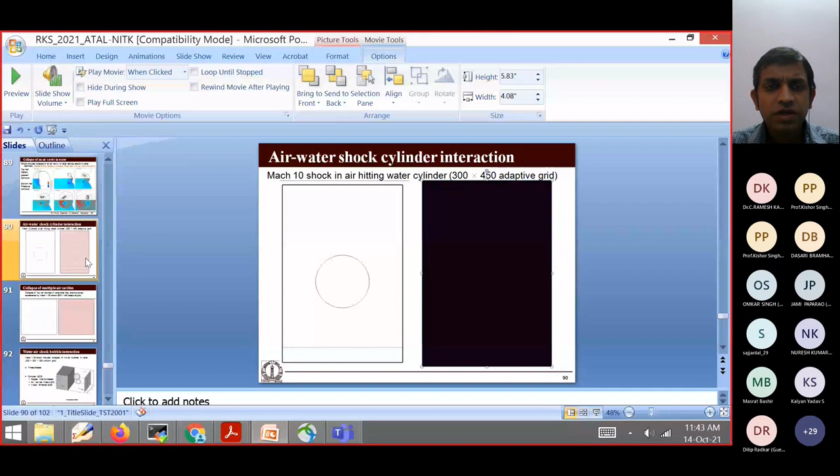Our adaptive mesh actually conforms to the gradients of the flow. So this is a generic framework which can be used for tackling these aero breakup problems as well.

There are a lot of applications in which one is interested in knowing, for instance, how a fuel droplet that is pushed at a very high speed will disintegrate in air. This is one of the setups that is relevant to that.

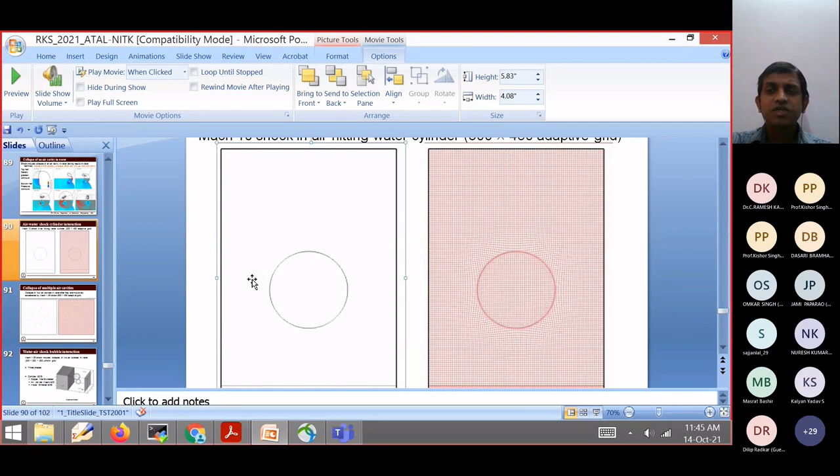As this drop is pushed through high-speed flow, the idea is to figure out how this will break up. This is not really something of direct relevance to cavitation bubble dynamics, but it's nonetheless a problem of interest, and these are also problems that can be tackled using our flow solver.

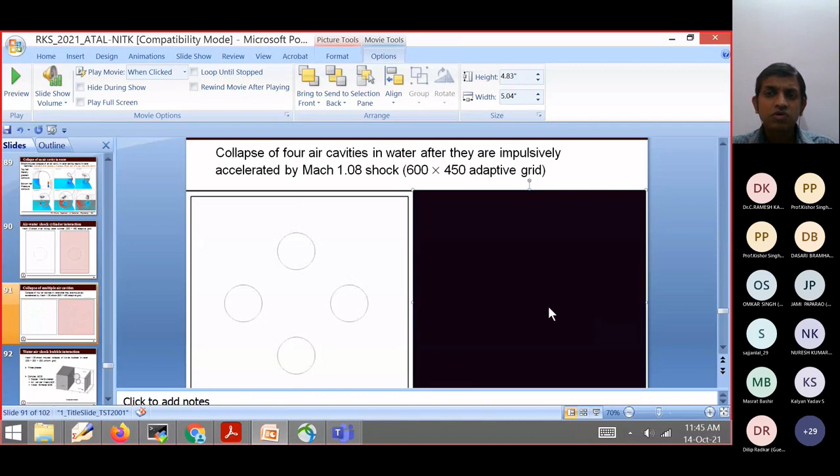And our mesh also conforms to the solution quite well. And you can see, just like the solution shown on the left, the mesh also kind of tells us what is happening to the flow field.

Okay, so these ideas are extendable to 3D as well. So I initially talked about the fact that one has to be able to simulate very complex equations of state, and treat them nicely as well, right?

So this is a full cavitation setup in which we have air bubbles sitting next to a copper medium. There's a shock in water that goes and hits these air bubbles, and the idea is we'll see what happens to copper. Does it undergo any damage or not?

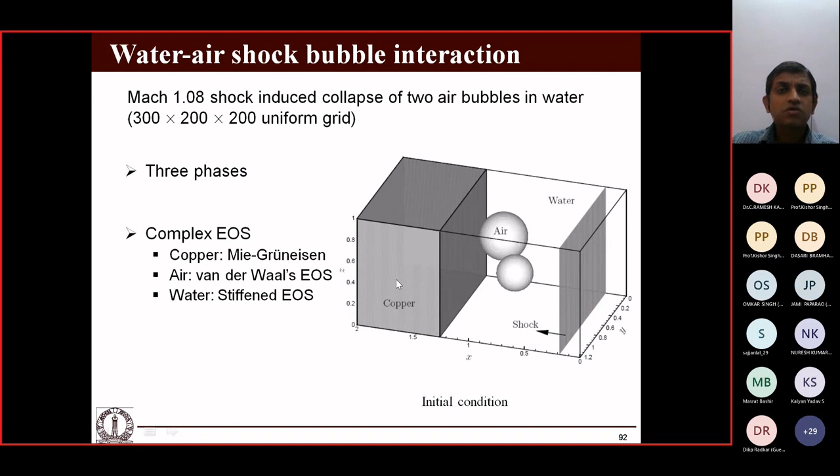Sorry, I think here again I'll have to apply the original trick of playing it first. Okay, let me try it again. I hope this is visible.

So these simulations can be used, as I mentioned before, to study something like drop shock interaction, aerodrop breakup, or even splash problems. We have also looked at a splash setup with full accounting of viscosity and surface tension effects, where a drop falls onto a pool of liquid.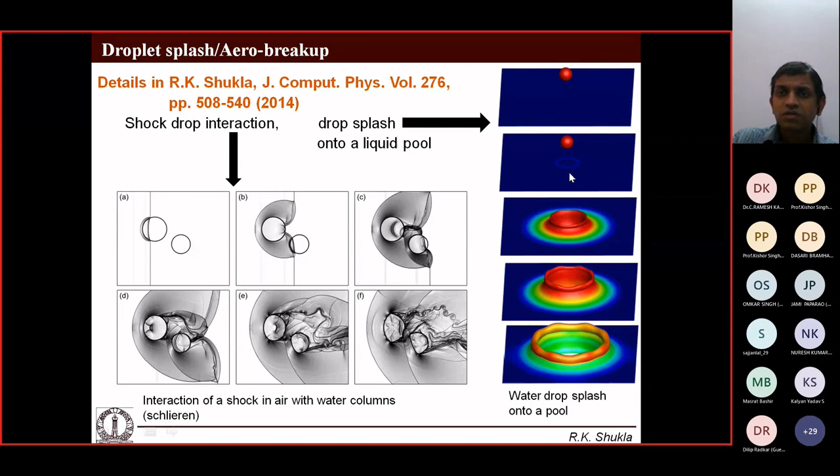You can see as the drop moves towards this liquid, because of its motion, a shock wave is created, and the footprint of that shock is seen here as the circular gradient. As this drop interacts with the pool, it leads to formation of a crater, and this crater grows, and the rim of this crater is susceptible to Rayleigh-Plateau instability. That's why, because of surface tension effects, you start seeing these undulations on top.

So this solver is quite generic, and it can account for surface tension and viscous effects as well.

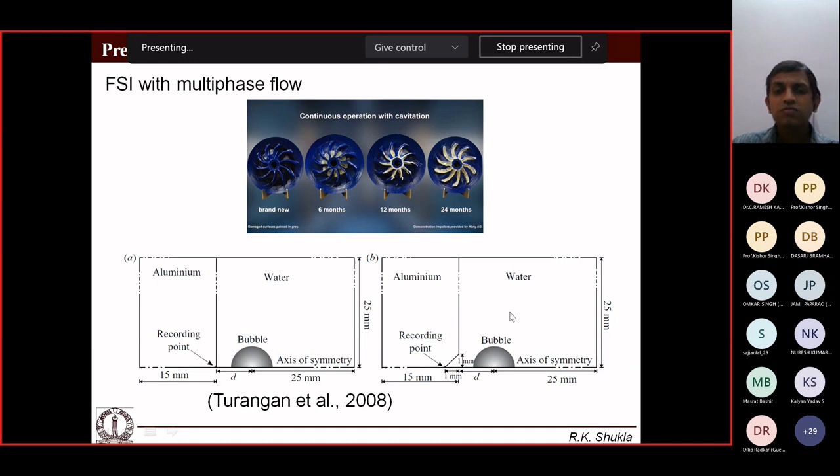As of now, what we are doing is looking at ways of extending this to treat solids as well. If you recall the original setup we want to study, structural damage, the structure is very much a part of this full setup. So one has to actually do fluid structure interaction along with multiphase flow to understand how damage occurs to a structure.

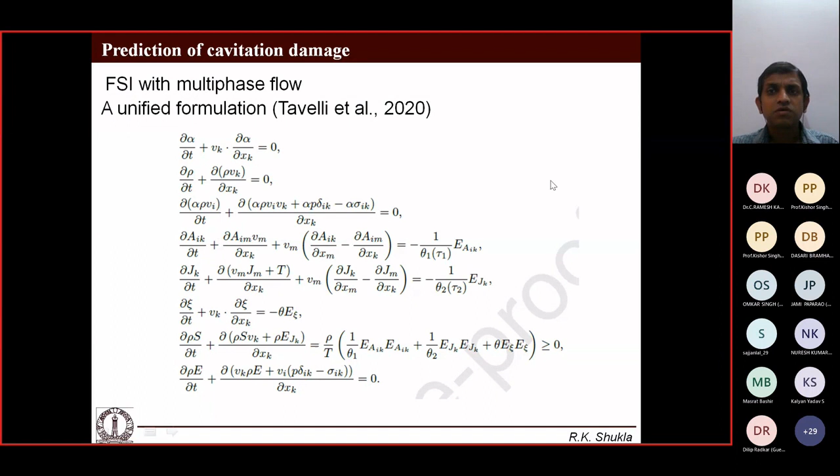So we are looking at a comprehensive treatment of the structure as well, where we would like to model the structure using the full set of equations for elastoplastic flow as well as viscous effects. We are looking at a unified formulation as of now, and this is what we are trying to achieve. These formulations are also possible, so I thought I'd mention that.

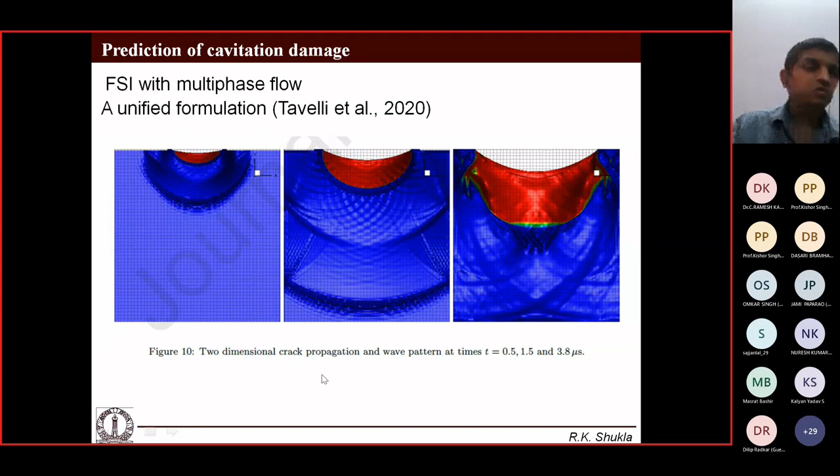Recently there have been works in which full elastic or elastoplastic solids interacting with other elastoplastic solids have come up. You can see this is a simulation in which a red bar goes and hits a solid-air interface. So simulations like these have actually become possible, and our hope is that in the near future we'll be able to use these to our advantage to look at the cavitation damage problem.

All right, so let me just summarize what I have shown before we move on to discussion. I started off describing compressible multiphase flows, why they require higher order treatments, why they require treatments in which dissipation is low, the necessity of adaptive grid redistribution, advanced interface treatments that ensure the interface does not diffuse over time, and treatments that can account for large density ratios.

Then, we didn't talk much about the time implicit viscous formulation, but these treatments can be such that the integration in time is implicit, so that the restriction on the time step is not too high. We know that viscosity can bring in very stiff limitation on the time step choice.

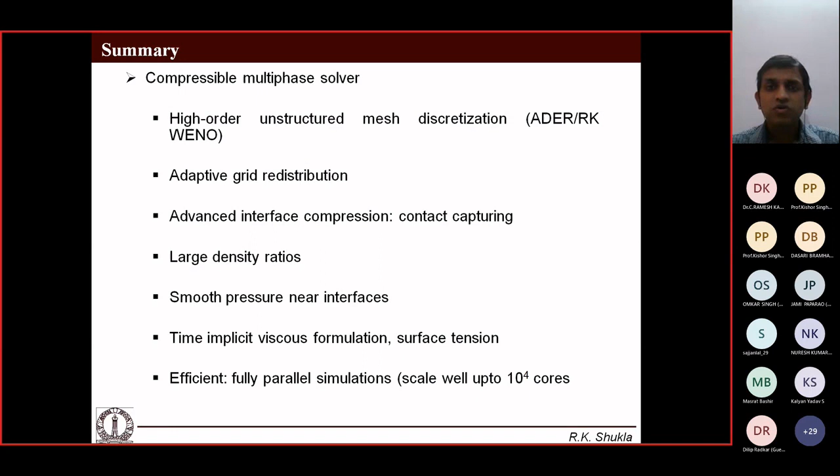Implicit time stepping is good for viscous formulation. Our treatment is also fully parallel, so it scales well up to 10 raised to power 4 cores. It's really well suited for HPC simulations of compressible multiphase flows.

For future challenges, we are looking at fully compressible unified setups in which we can simulate FSI and multiphase flows together. We are also continuously looking for advanced interface treatments. The better the interface treatment, the more efficient our solver will be, and the more complicated cases we'll be able to handle. So we are also looking at cavitation inception, how to ensure that bubbles can be grown in scenarios where there's cavitation inception.

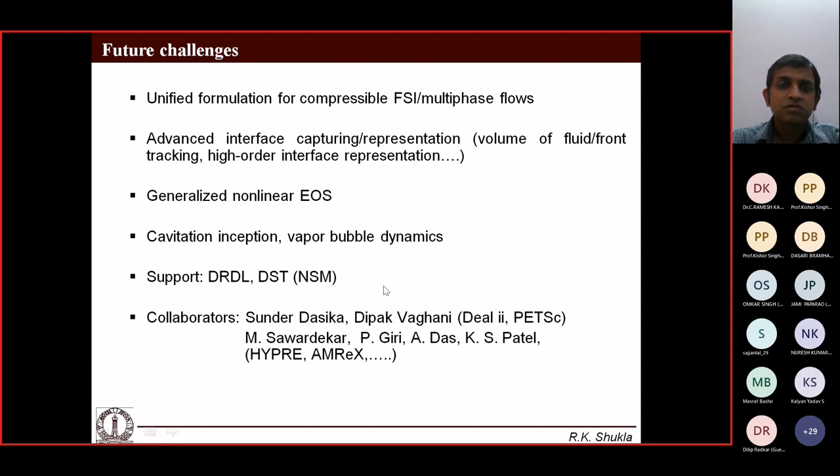This work has been possible through support from DRDL and DST, and a lot of different students have contributed to it. Sunder Dasika, Dipak Vaghani, they have contributed extensively through developing these packages and tuning them to our needs, Deal ii and PETSc. Quite a bit of it relies on HYPRE and AMReX as well. Mahesh, Sawardekar, Preetham, Anil, and Professor Patel here, they have all contributed to our understanding of these packages as well. So with that, I would like to thank you for your attention, and I can take questions now.

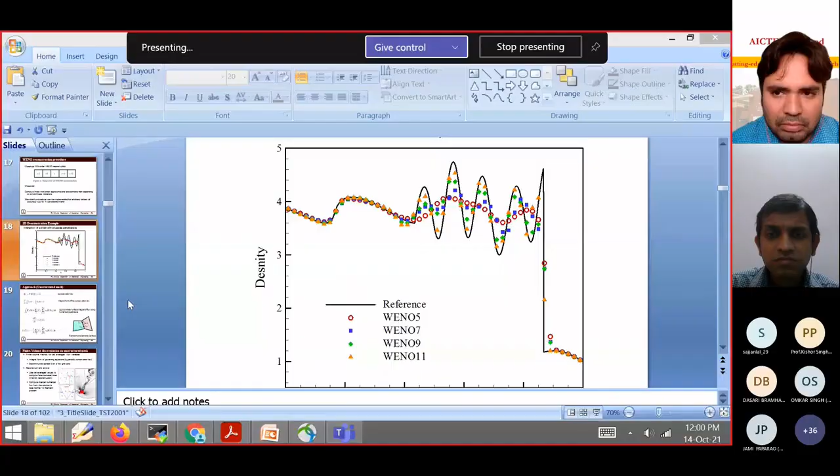I hope you can see this slide. Yes. If you look at it, this part does look sinusoidal, but it's going up and down, doesn't have a constant mean, and here you have full nonlinearity. This part is not really linear. Out here it's linear, beyond this point it's not. So here it was linear, the shock went like this, and it made it completely nonlinear.

So if one wants to solve this problem, one can obviously put a lot of points and solve it, there's no issue with that. But the idea was to show what happens with increasing orders of accuracy. Is there an improvement? And we actually found that there is an improvement. So that means there's value to pursue these kinds of methods. Basically, that's the basic takeaway message.

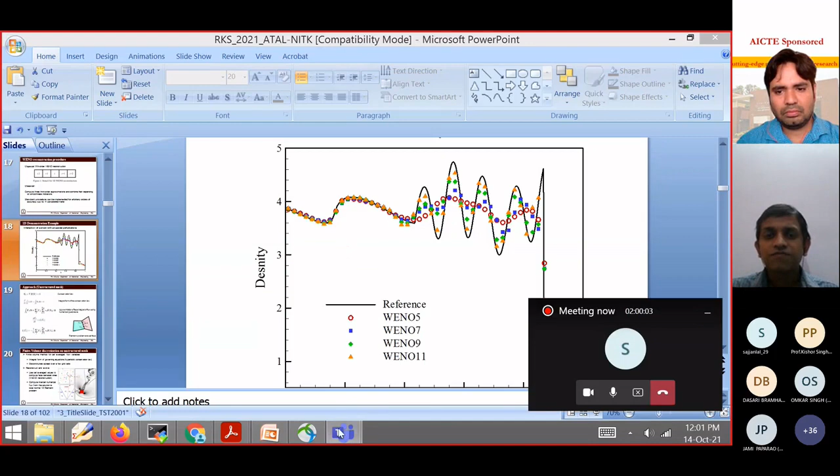If we think about more general problems like shock-turbulence interaction, we will most likely get advantages there as well with these methods, or even shock-bubble interaction. Okay, sir, thank you, sir.